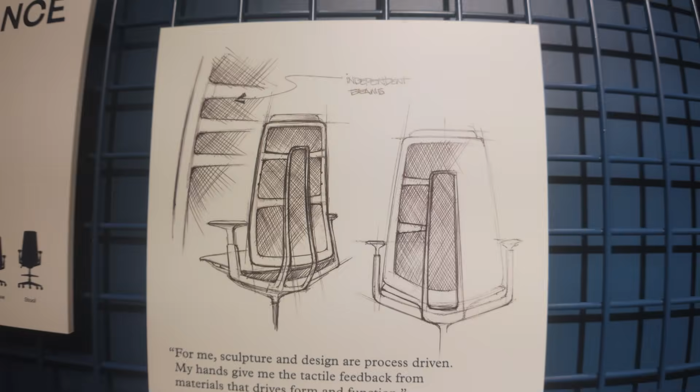The assumption is that the object was once fragile, a sketch. A question on paper asking, what if? But what if it's deeper than that? What if ideas don't begin on paper at all? What if they start when vision turns inward?

In the dark, in silence, when the world stops demanding attention, when scale dissolves, when objects float. Many people get ideas in the shower, not because of the water, but because the noise disappears, and the mind is free to wander. Ideas arrive distorted, incomplete, abstract, more like a sensation than a shape.

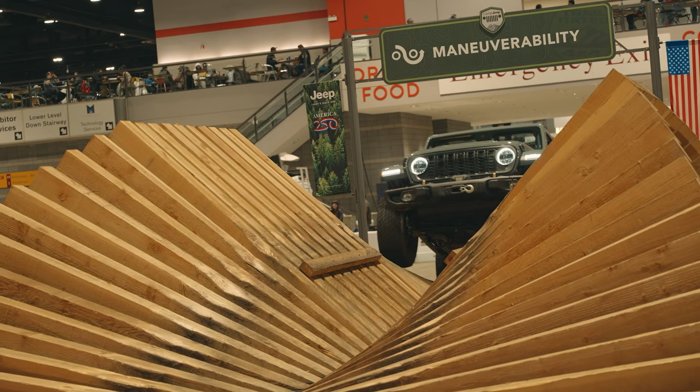And once one stays long enough to be remembered, it starts asking to be made real. I've spent a lot of time admiring finished things, polished things, powerful things. Objects built to move, to cut through air, defined by motion. But at some point, watching isn't enough, because ideas don't become real until you apply pressure, until you commit, until you leave a mark.

Man, I fucking love product design. In my life, I've had the good fortune of working on so many creative projects, but recently I've come to the realization that all of my efforts are living in the digital realm.

Sure, sometimes I'll print my photos, right? And this is amazing. I walk by this every day and I get to recollect this journey I went on to this remote location in the middle of the desert, and I had to deflate my tires in order to not get stranded out there. But this is what I want. I want to make something real.

And so I've decided, let me do something with this. I've decided to start a 3D printed home decor business. If you're thinking about doing something similar, I'll take you along the way, from the start all the way to shipping of products. One person, one printer, very little money. Should be fine, right?

Oh, hey. You may be assuming that starting a 3D printed home decor business would start by maybe sketching some ideas, but no. We're talking to girls from China, or maybe they're robots, or maybe they're dudes. I don't know. Doesn't matter, because this is not a dating site. We are ordering parts wholesale from Alibaba.

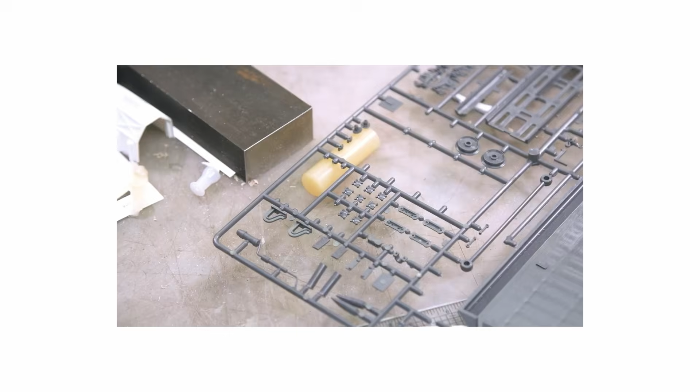While watching an Adam Savage video, he was talking about how he used to kitbash, layering tiny parts onto miniature props for film sets to make them feel complex and believable. George Lucas from Star Wars called those little added details greeblies, which are small, often non-functional pieces glued onto a surface to suggest mechanical complexity.

In a way, 3D printing has its own version of greeblies. Layer lines, infill patterns, geometric textures, etc. When added detail meets visible structure, the result is a brand that celebrates how things are built. Introducing Greeble.

Establishing a brand is huge, and with that in place, we could start the design process. Designing a product is hard though, so let's procrastinate a bit and just think about design. You don't want to immediately just start drawing ideas and sketching. It's helpful to first curate inspirational images to help you visualize the type of product you want to design. Pinterest is a common tool to do this, and after using it for a bit, here's what I came up with. I grouped inspirational images into 3 categories.

First up, we have grid. Modern designs often have crisp edges to them, and studying grid-like forms seems like a no-brainer for designing a 3D printed clock. The next bucket of inspiration I put together centers around the theme of shapes within shapes. Designing the overall form is one thing, but there are so many cool things that could be done on the detail level. Textures within textures, implied shapes, and even disguising functional elements of a product within the product's texture. Finally, it never hurts to grab some inspirational images from other 3D printed products.

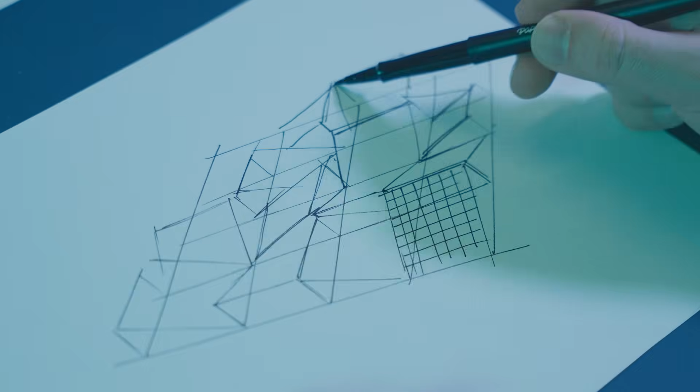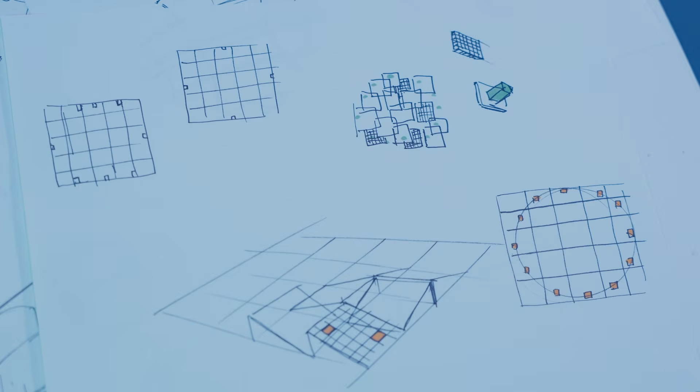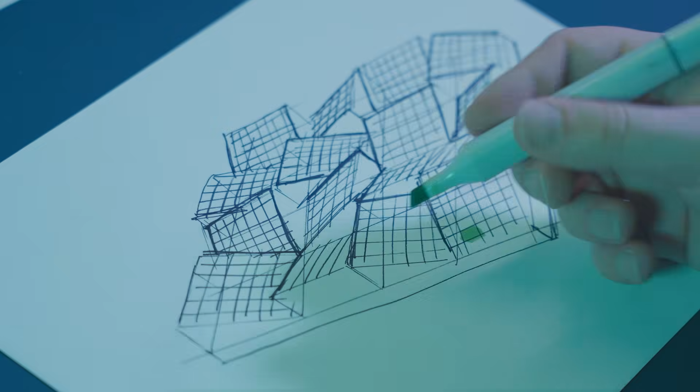I sketched a bunch of ideas, and not gonna lie, I didn't exactly come up with a ton of great ideas, but there were a few good nuggets in there. This idea here was intriguing, overlaying squares with mesh grids, but this would be kind of complicated and probably too many parts. So then I explored how to mark a clock by overlaying it onto a grid, and this ultimately led me to an interesting idea where these wedge shapes extrude up at random directions. After drawing this again with more clarity and refinement, the idea is set.

The next step is to 3D model this thing, but I should probably wait until I get the parts from China so that I don't put in the work to figure things out and then get the parts and have to remeasure and redo a bunch of things, and it's not going to be good. One eternity later.

All right. It took about a month and a half, but the parts from China are finally here. Few initial thoughts: shit ton of tape. I guess it's got to go a long ways, but also the package is a little smaller than I anticipated. I hope everything's in here; I should have 350 clock parts in this package. Sounds crazy. I'm so excited to open and actually kind of nervous to open this box because

quick moment of confession, I actually took forever to do this unboxing video. So not only did a month and a half pass of shipping to me, but it was probably another month or two of me waiting to do this video. So I am nervous because there's no warranty period anymore if what I want is not in this box. What's in the box? So yeah, let's open this up.

All right, moment of truth. So much tape. God. Woo! All right, right off the bat, I'm hyped because these are the right colors. So, sweet baby Jesus, it's all good. Look at how tightly packed this box is. Unreal. I mean, look at this. It's just all over the place. It's actually amazing that these look like they are intact. You can see the rest of the box.

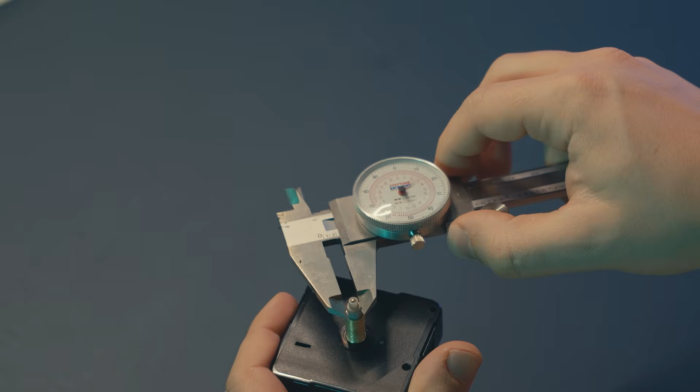Woo! We're in business. The parts from China are in hand, but before deciding to do anything with them, I've decided to give myself a 10-day timeline to go from these plastic parts to a functional working product listed on Etsy. There's no time to waste, so the clock starts now. For the 3D model I'll be creating, I'll need to take a precise measurement of the clock movement assembly. To do this, I'll be using an old school dial caliper. First, I sketched orthographic views of the part. Next, I measured the clock movement with the caliper and added in the overall dimensions to create a rough engineering style annotation sheet.

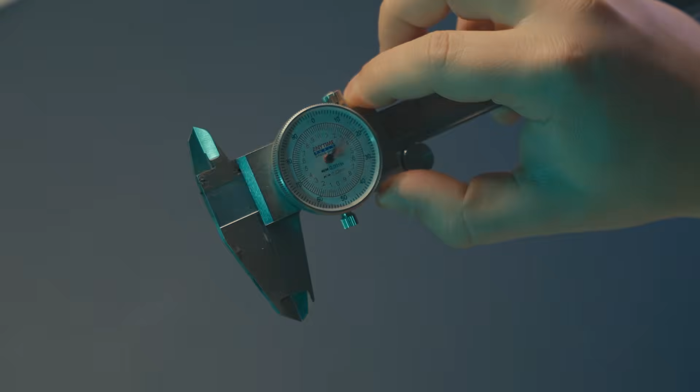Oh, and by the way, if you have experience using a caliper but have never used a dial caliper, like a manual one here, just know I'm better than you. Yeah, all jokes aside, my teacher from design school told us to buy these manual dial calipers instead of the digital ones because these are harder to use. And his argument was if you work in an office, people won't steal your caliper. I guess that happened to him. So we all bought these and here I am using an unnecessarily harder to use tool.

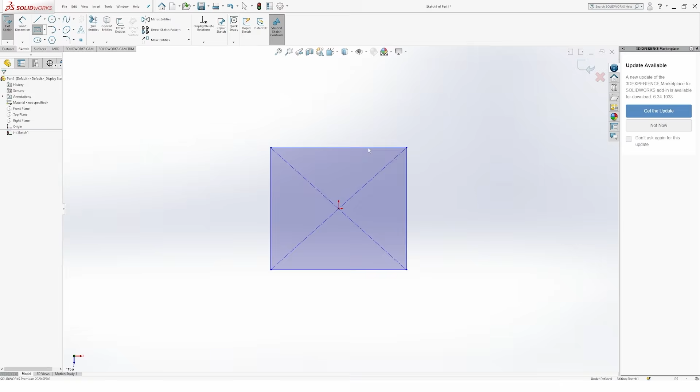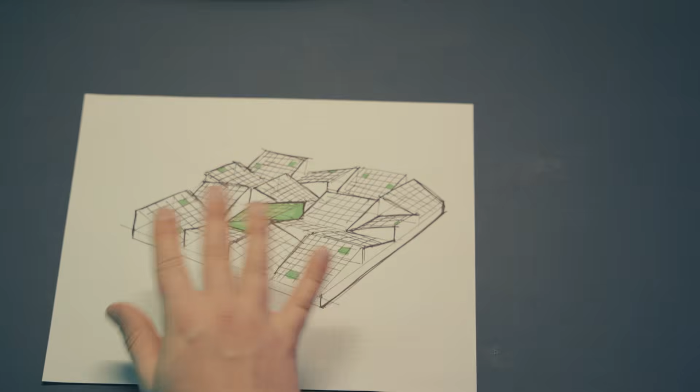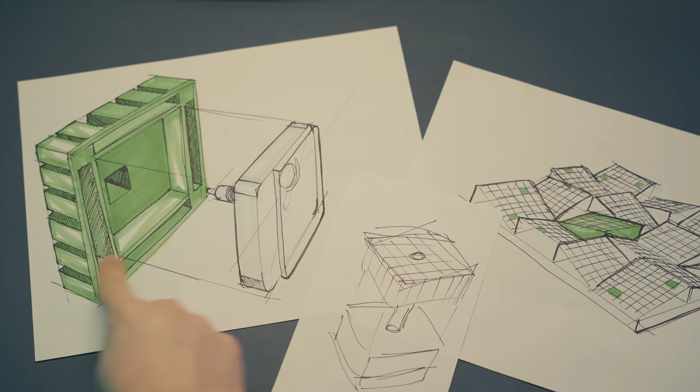But on to the next phase. By using the annotated drawing sheet I did with measurements, I created a precise 3D model of the mechanism I purchased. This model will be necessary for prototyping how this will fit within the clock design. Okay, here's the plan so far. Here's a rough sketch of the overall design. I colored this little area in green because we're going to focus on how to hide our mechanism under a little cap and then disguise it amongst the rest of the design. Here's kind of what that looks like. Let me reposition this. We have our mechanism and it fits right inside this little cavity. There's a little space for the thread to go through. And also there's these little slots which will help dock the part into the base.

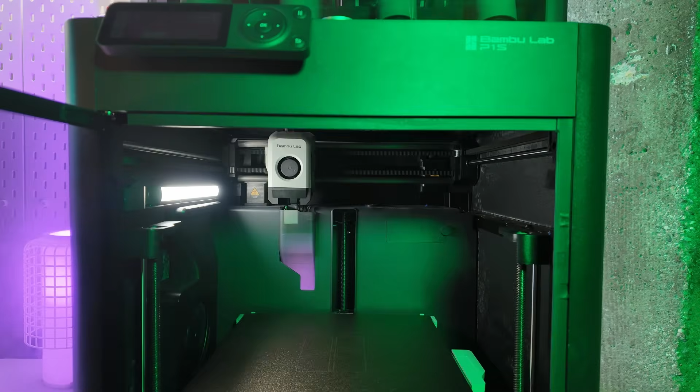Before printing and prototyping this, what needs to happen is a quick little prototype of just the tolerance to make sure that this part right here fits nice and snug inside this cavity. Whipping up a test part in SolidWorks was super easy. I made 3 different parts with slightly different tolerances to test the fit. After printing these on my Bambu P1S and checking how the clock movement fits in all of these parts, the version with the 0.2mm tolerance was perfect. Nice. With that tolerance in mind, I then 3D modeled an actual prototype for how this mechanism can be housed and assembled.

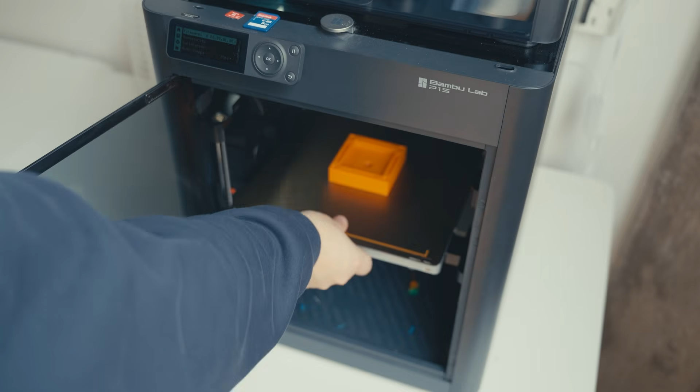Here are the 2 parts we just printed. The dimensions for the inner part right here came from this ring that we just prototyped. So we already know, look at that, fits perfect. What we don't know is whether or not these grooves right here and these grooves right here are going to fit nicely. So this is the cap, very simple, no design, we're just testing how parts fit together. So moment of truth. Oh, look at that. It's perfect. I used the same sort of tolerance from this test for this, and it works perfect.

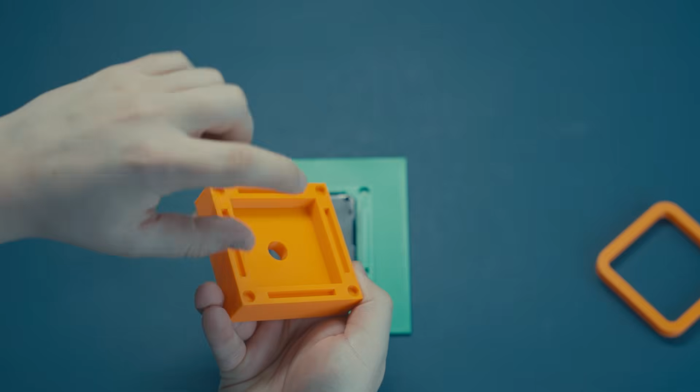Yeah, there's only a few things. So you can see here the clock movement part sticks out a little bit more than I'd want. So that's easy. You could just make this dimension a little bit taller. Looking at it also, I think this cavity is a little deeper than it needs to be, because if I move it around, it shakes a little bit. Not a huge deal, but I think if I make this a little bit more shallow, it'll just press against the top part of this mechanism and hold it in nicely.

Printer's broke. Yep. Entire means of production just went down. I mean, it's just the one printer, so it kind of begs the question, is that even enough to support a 3D printed business? Luckily, it's just the phase of the project where we're developing things internally. I say we, it's just me, but yeah, gotta fix this thing. So,

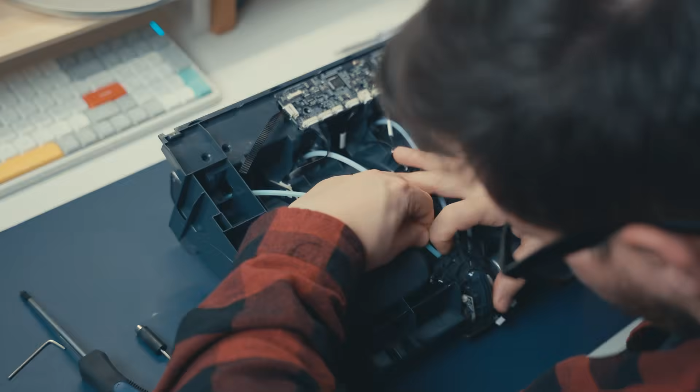should be fun. Naturally, my first thought was to tap into my caveman IQ and poke this thing with a piece of plastic. After this did absolutely nothing, I had to take my machine apart for the first time. And after I pulled this tube out, I found a jammed up piece of plastic. Problem is fixed, but another issue is at hand.

When this thing's operational and printing, it's loud as fuck, and it's kind of problematic, specifically because of how my place is set up. Let me show you. This thing makes a ton of noise, right? But the issue is, the noise will bounce, bounce, bounce, and here we go. I do not have floor to ceiling walls. So the sound waves will just bounce right on over here, and then finally disrupt my sleep.

I am running out of time. Learning to fix that 3D printer cost me like a day and a half, and so I need to hustle. I only have a week to finish everything. That's the product design and figuring out how to sell and ship this thing to make my first Etsy sale. If I'm going to meet this deadline, I need to plan ahead and order some shipping supplies. I just spent a ton of time 3D modeling my concept and it looks great, but I have to pivot. Can you believe that?

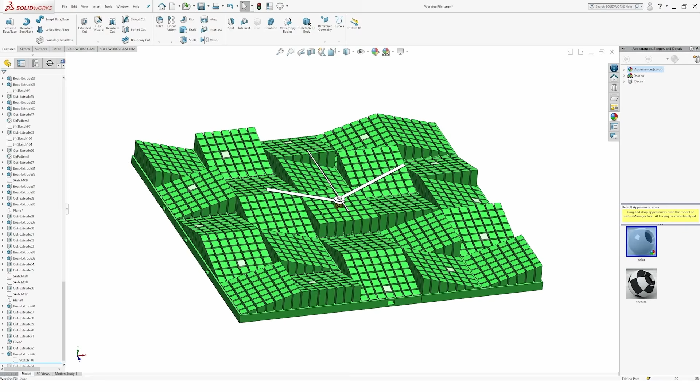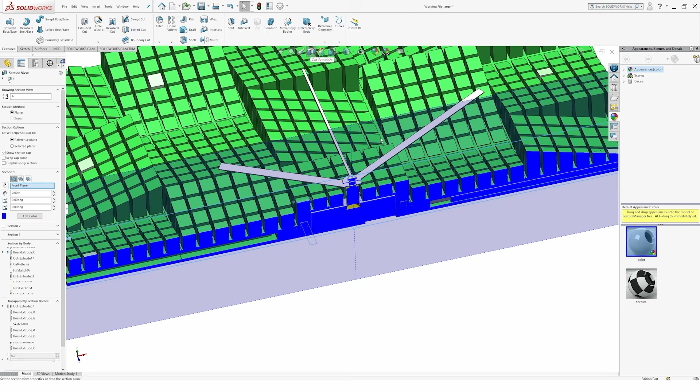Let me explain. All right, so this is the product design. It's looking pretty sick. I stayed true to the middle cap prototype that I just did. You can see I added more detail to tie it in with this whole wedge shape, square grid design I got going on. You can't even tell that this is a cap. And if I were to hide this, you could see that our part is inside. And so if I unhide that and then activate the section view, you can see what's going on. The cap just easily attaches to the base, bada bing.

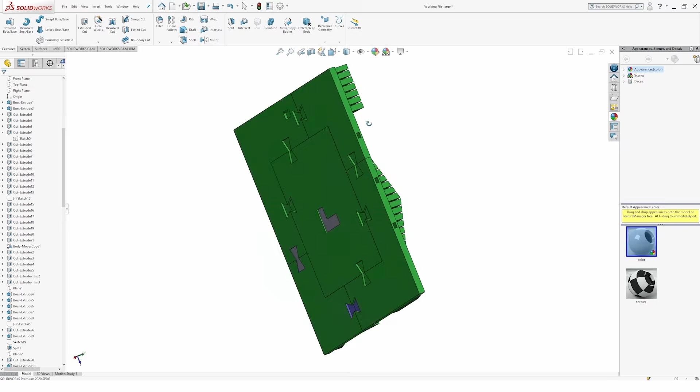But where this gets complicated is that I realized I had to break this up into multiple parts because this is way too big for my printer. And that's when I started doing all of this. I'm like, okay, I got to split this up here and add some dovetails to combine these. And then, oh, maybe I need some channels to improve the integrity and the strength. But thinking about this, I started to not envy future me having to assemble like 6 or 8 or even 10 different parts and form one solid cohesive product.

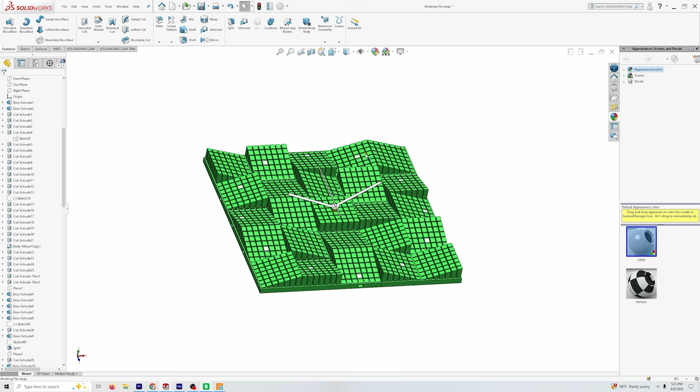So this product needs to be reduced. It's kind of sad because it'll lose a little bit of the design intent, but it needs to happen. Luckily, all I had to do was hide the outer ring of this larger clock design. And then I have a product design. Look at that. It's looking good. Now I just need to patch these things up to make it all solid here. And this was the little cutout I made to be able to swap out the battery. And yeah, time to print her up.

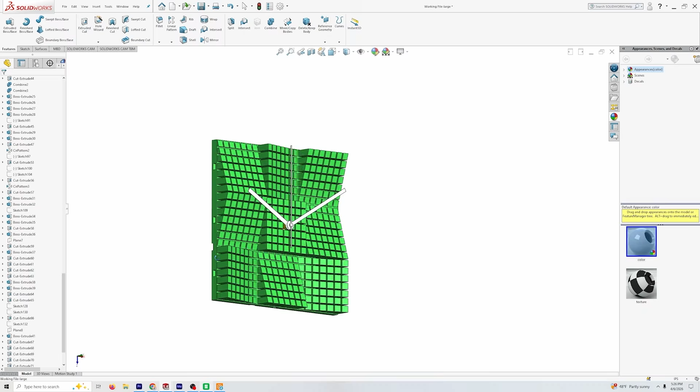Here it is. This thing turned out so sick. As you can see, the middle cap area blends in perfectly with the form, and you can't even tell it's a separate part. It also fits perfectly snug when pressed into the base. To assemble this thing, I glued the mechanical movement assembly to the base of the clock, and then glued the cap on over it. Lastly, I pressed in the hands to install them, and then put in a battery to test it out.

Woohoo! So far, everything up to designing and making a 3D printed product has been pretty smooth. But now it's time to ship this thing, and let me tell you, this is where everything starts to fall apart. I'm a little embarrassed to say, but the first box I bought was a 9x9-inch box that just barely was big enough to fit the product.

I thought if I designed some sort of pull tab, I'd be able to pull the product out and I wouldn't need packaging supplies because it'd be nice and tight inside the box, but obviously the friction was way too much and the thing just wasn't able to be removed from the box. Sadly, since I had to order new boxes and it takes time for them to get here, it's gonna mean the 10-day deadline kind of just falls apart and dies. It's an unfortunate thing, but I'm not gonna quit and I'm gonna finish this project.

This was the new box I ordered, and other than being appropriately sized, it only opens one direction, and that's huge because then I can control the user experience when opening the box. Before, the other box you could open from the bottom or the top, and it's just unpredictable. For the packaging, this is what I came up with. I have the Greeble logo here with a nice on-brand tissue paper.

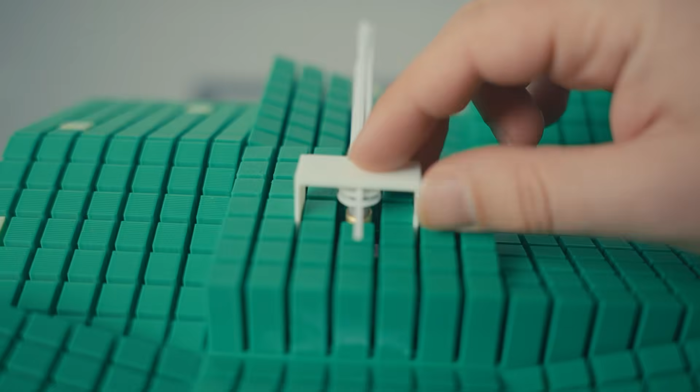I sent the new packaging to my friend again, and somehow, despite having covered the clock hands, they arrived disconnected. At least the clock arrived intact this time, but how the hell did the clock hands arrive flipped over when I had a hard-shelled piece cover them? Anyways, for one more iteration, I added a little bump to the cover to apply pressure to the hands. Third time is a charm, so after shipping this product one more time to test it out, it finally arrived intact.

With everything squared away, it was time to list this thing on Etsy and wait for orders to fly in. And waiting, I did too much of. For a whole month, while this thing was listed, I got 0 views, 0 clicks, nobody's seeing this thing, and of course, nobody's buying it. I even designed and listed a second product so that my shop wasn't so lonely with just one listing.

The only good thing that came out of this long period of time of no sales was that I got to work on the packaging. I bought these blank label stickers from Avery and was able to print custom graphics on them. All I had to do was peel them off and place them over my blank box to add a professional look to my product. Coming back to the no sales problem, turns out the only thing I needed to do was initiate Etsy ads. As soon as I did that, some views started coming in, and boom, got my first sale. And that's it. This is the part of the video where I say I finally made something real.